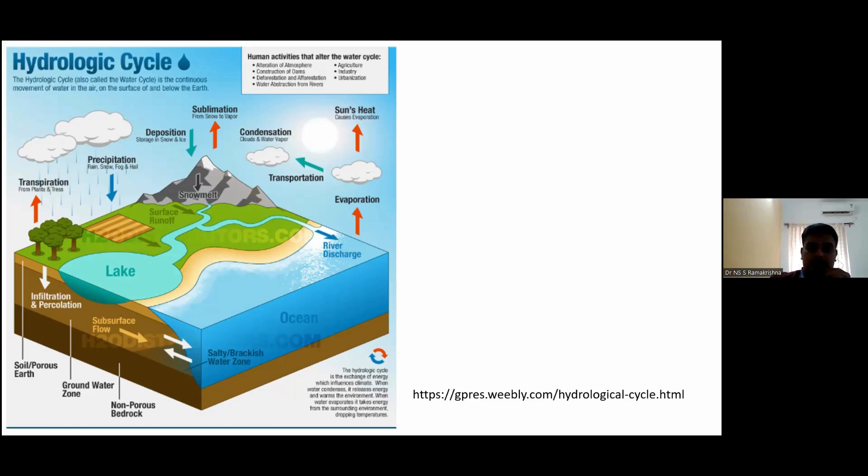Nowadays we can witness irregularity in rainfall. That is also one of the reasons we face water issues, mainly due to deforestation and increased urbanization. These things we need to address.

Then, what are the traditional methods of water conservation? If you see the traditional methods, rainwater harvesting is the best practice from ancient days. Nowadays in some cities it is mandatory, like we need to go for rainwater harvesting, then only the house construction license will be provided, so there is a policy for it. Then efficient irrigation - which irrigation system is effective both for the yield and for the crop, and you can save water also.

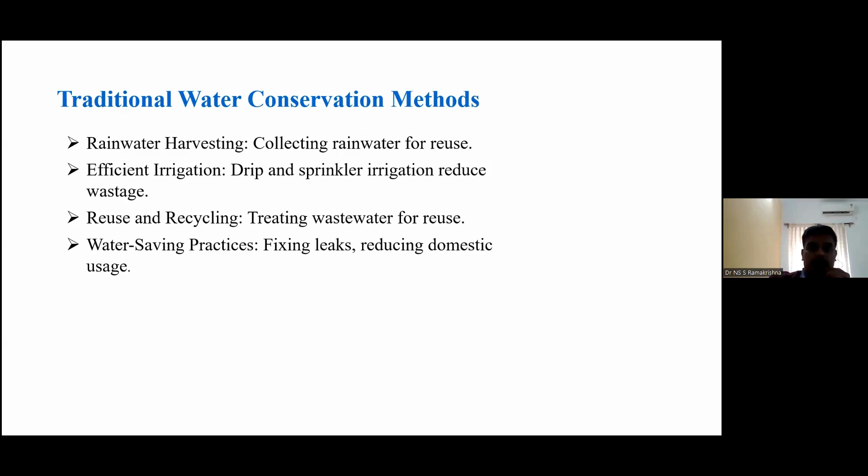And is there any reuse of wastewater? All those practices, along with water saving practices by individuals, will help us save water. You can see in different regions the names are different, but these kinds of structures nearby we can also see, and if you go to any states or nearby states, these kinds of structures will be there.

In some regions it may be called talab, a reservoir kind of thing. In some particular places it is a johad, a community pond, with a community based temple and some ponds. That used to be one of the conservation methods. We can call it Kalyani and all. Then step wells, that is in Gujarat and other places.

There may be a jhalara as they call it, and some earthen bunds, also vented dams. Farmers used to construct vented dams, earthen bunds, to stop the water during the rainy season when there is heavy rain. This water can be used for agriculture or drinking purposes. Then flood water harvesting - excess water we can harvest and save for the non-rainy seasons. We can learn from our ancestors how beautifully they constructed these structures for water storage.

In the lowest region of the city, they used to identify the place for water harvesting, and the conveyance system, how the water is conveyed along the way to the city to these particular places, conserving it in a holistic way.

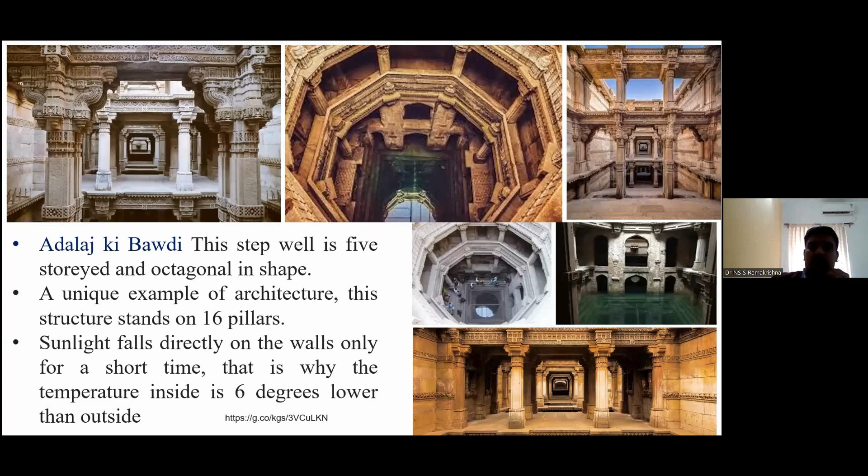This particular example is the Adalaj ki Bawdi, in Ahmedabad, Gujarat. It is a step well, five storeys, octagonal in shape. It's a unique example of architecture having 16 pillars, and sunlight falls on the walls for a very short time, so inside this structure it's always cool. They used to use this water, giving a holistic approach for conserving it.

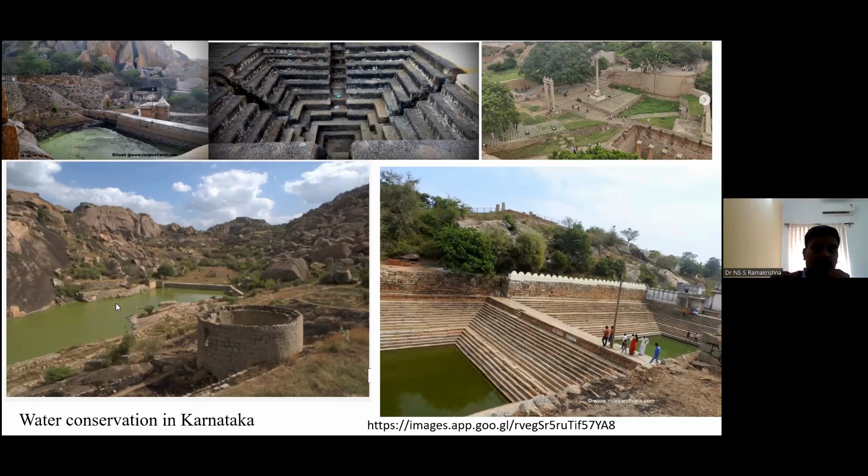These are some other water conservation practices nearby, in Karnataka or other states, where the practice is similar. Take any forts where kingdoms used to be - they used to convey water from the catchment area to a particular pond, filter it using traditional techniques, reuse it with minimum wastage. Some examples are in Melkote near Mysore, Chitradurga and nearby places, where water was stored, conserved, taken into wells and distributed back.

Rainwater harvesting is the best way of storing water. If you harvest rainwater, it reduces the burden of pumping water from source to the end user. Also, resource management will be well maintained.

What are the components of rainwater harvesting? First, the catchment area - our rooftop is a catchment. From the rooftop or pavement or ground, we can collect water on the downstream side, and through gutters, pipes or channels carry and store it. Using basic screening materials like sand, coarse aggregate, fine aggregate and charcoal, you can filter and use it. If properly filtered, you can use it for drinking purposes, and it's well suited for irrigation and, without filtering, at least for toilet flushing.

This reduces the burden of pumping water from source to consumer. Water conservation reduces dependency on groundwater and municipal water - we should not rely on a single source. During the March season, municipal water supply will be very less, and water quality will also deteriorate for many reasons.

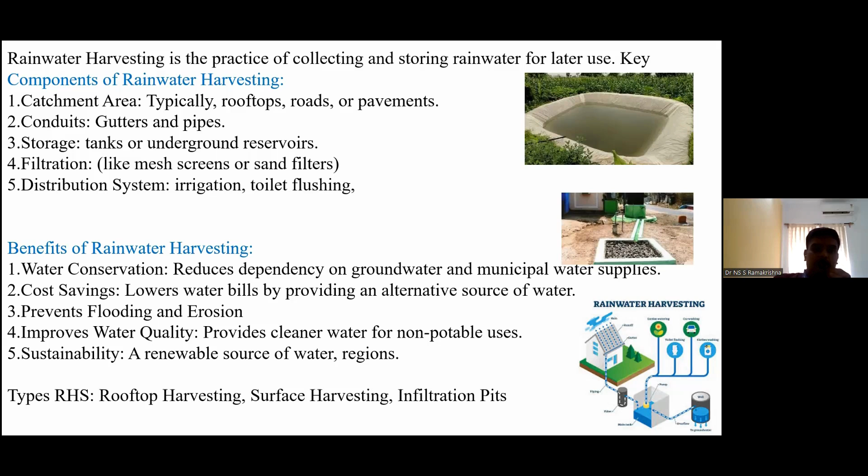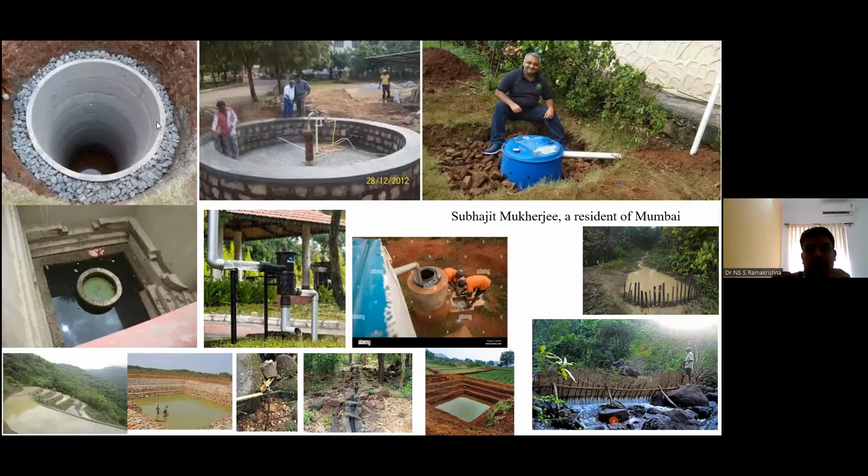Rainwater harvesting can be of any type, smaller or bigger - it's not a problem. Here are some best practices: some construct wells, which should be perforated so nearby water can infiltrate or percolate through this kind of structure. If using rings and such, make sure there is perforation or holes for groundwater to enter.

Besides that, you can make coarse aggregate provisions, or use waste tiles poured next to the piping, so it acts like a gallery where rainwater is harvested and filtered into the well. This way, you at least contribute to groundwater recharge - it may not serve your own purpose directly, but it will recharge nearby wells or the groundwater table.

If it is a tube well, you can construct these kind of structures surrounding it, in a circle, rectangle, or any geometric shape. You can harvest the water using coarse aggregate, fine aggregate, sand, and charcoal combination in layers, so that the infiltrated water has no impurities. This way you can recharge your tube wells or open wells, and it will contribute to the groundwater table increase and groundwater recharge.

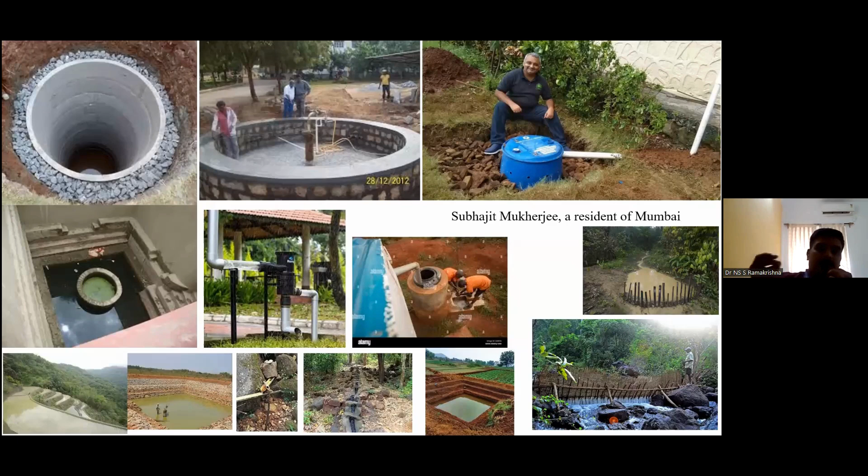Another example, usually seen in rural areas: there will be a pond. In the downstream areas, they select a spot, construct a bund, and store the water. Inside the pond, there will be an open well. The soil acts like an infiltration or filtering media, so the filtered water gets inside the open well. From the open well, that water can be pumped for daily utility usage.

Nowadays you can see this particular filtering media readily available. From the rooftop, this filtering media can be bought from a local vendor, and the first harvested water should not be directly allowed into the borewell or open well. Later, after one or two harvests, the rooftop will be clean. After that, you can close this outlet and directly put the water into the tube well or open well.

There is nothing like this being the only way of harvesting. In a simple way, we can also harvest using locally available materials, or whatever broken tanks or facility we have. Using that, at least we can contribute some portion to groundwater recharge, which will be a great help for our mother nature.

This is a very small bund they have constructed, and this will be sufficient for one or two months for agriculture purposes or animal drinking water. You can see the contour type of cultivation: on a sloping ground, we make contour shapes so water will be stored. After filling the topmost contour, it reaches the next, and the next. By doing this, we can reduce soil erosion as well as contribute to groundwater recharge.

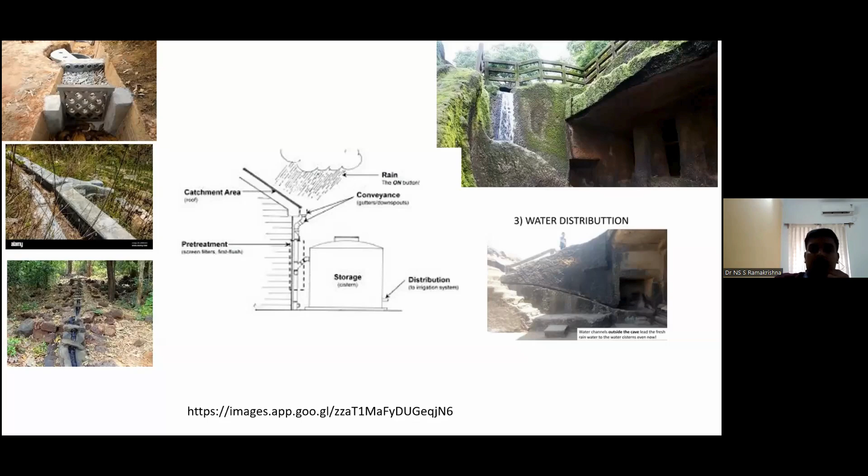In older days also they have practiced this. If you visit any fort, the water management is very well done. I can take the example of Sinhagad Fort. They have a very good water conservation plan.

In the catchment, the topmost catchment, they have wall provisions where all the rainwater will be diverted towards a particular pond. In the pond, it will filter and enter another pond. After filtering, they will use the water for drinking purpose and daily utility purpose. This was the best practice which they had adopted in those days.

Even when the enemy used to attack their fort, they used to plan to stop their drinking water and food provision. But these kingdoms were maintaining water for agriculture and drinking purposes so that without moving out from the fort, they could survive at least 5 years. That was the plan they used to make.

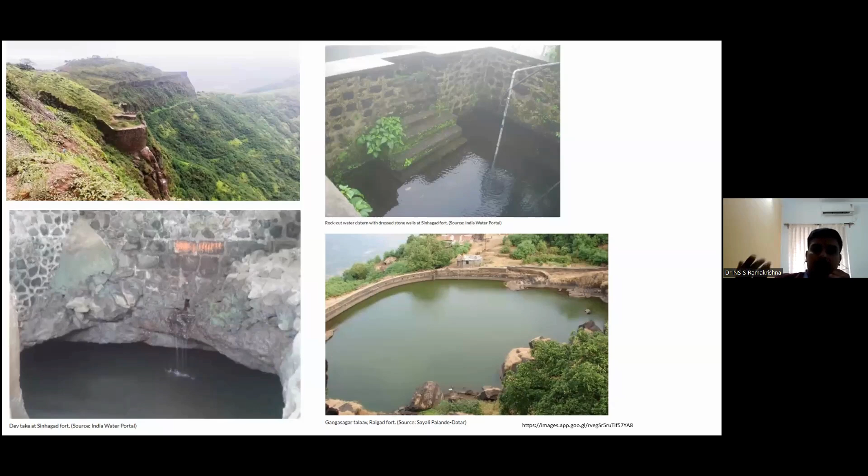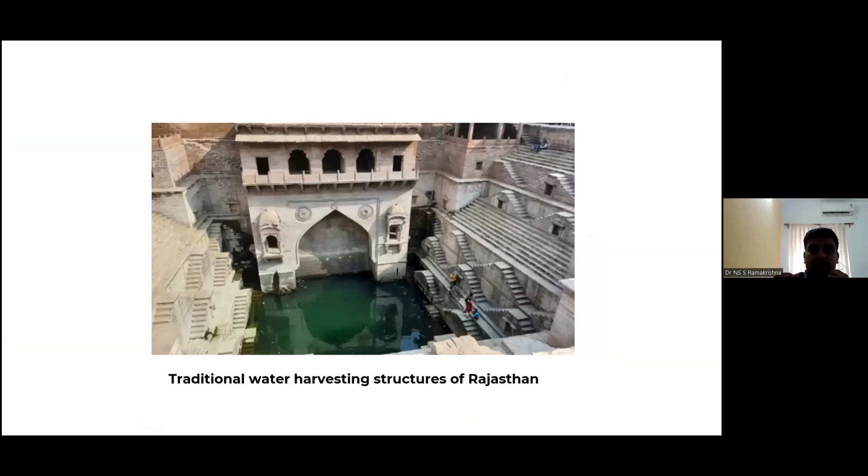So the best practice should be followed in all ways. When coming to harvesting, we need to harvest the water, that is the source of water, the precipitation, then how to save the water. The next portion is maximum utility, which is irrigation. That's because India is an agriculture dependent area, say 70 percent of farmers are dependent on irrigation and all.

So what type of irrigation is suitable? Drip irrigation is the best one because of its efficiency. You can irrigate during non-shining hours. In the daytime, you need not provide water because it may be lost in the form of evaporation. So you can utilize this water by irrigating during the night, so that in the daytime the evaporation will be less, there will be a cooling effect, and whatever amount of water is required for the crop will be self sufficient.

For some crops it is not feasible, for example annual crops, we can't provide drip irrigation. So we have max to max used it where it is a plantation crop, drip irrigation is most useful. In some annual crops, if drip irrigation is not feasible, go for sprinkler irrigation.

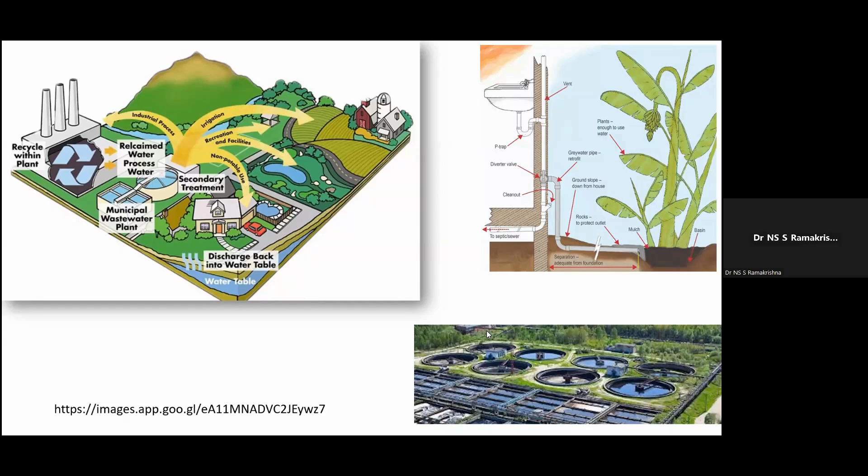Then at a large scale, say industry and domestic combined, all the sewage water can be recycled. Nowadays in Singapore, they are utilizing recycled water only. In India, and in Bangalore also, we have sewage treatment plants, so efficiently we are converting used water into usable water.

Then in an individual manner, if you have some motivation towards our mother earth, instead of using a flood irrigation system, we can go for drip irrigation and mulching around the plant, so that we can control evaporation. Rather than taking long showers, we can cut it off to 5 minutes or less.

Then we can reduce flush tank usage. If you put a filled bottle in your flush tank, you can save 2 liters of water. So if the flushing is set for 20 liters, you can reduce it to 15 liters with some slight modification. In some flush tanks, maximum and minimum water control is also provided, so you can encourage buying those kinds of fixtures.

Use energy saving washing machines, and use nozzle guns instead of ordinary piping of water. Faucets should have aerators, which will reduce the amount of water in a drastic manner. Whenever taps are not in use, please turn them off. And whenever brooming is possible, rather than jet wash, go for brooming.

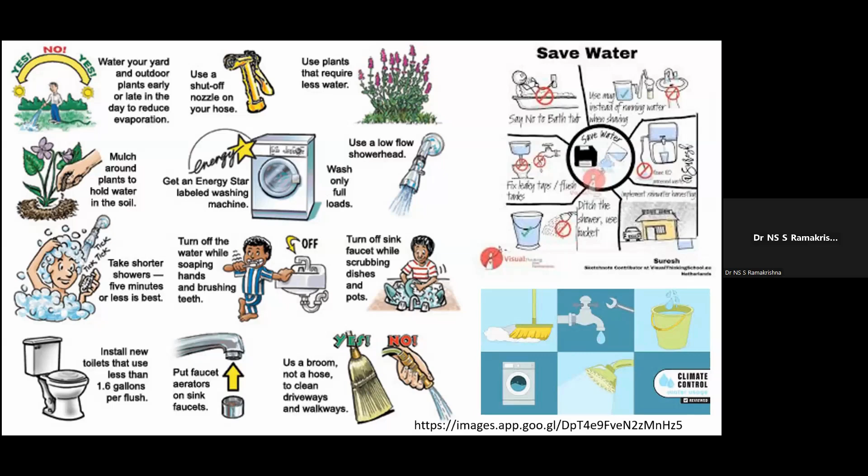So then there is an innovative solution. What technology can be used for saving water? Nowadays everything is smart, so why not in irrigation also, in a smarter way? You can use soil moisture sensors and automatic watering systems. It is possible - in other countries they have already adopted this. They use all the weather parameters as input, and soil moisture sensors for measuring the soil moisture.

That data is also given as input for the Internet of Things. Then it will logically identify crop water requirement and crop demand - we have studies on how much crop requires, what amount of irrigation is needed. Using these techniques, we can optimize irrigation, which will give better yield and better efficiency. These kinds of techniques are useful, whether in a small scale or a large scale.

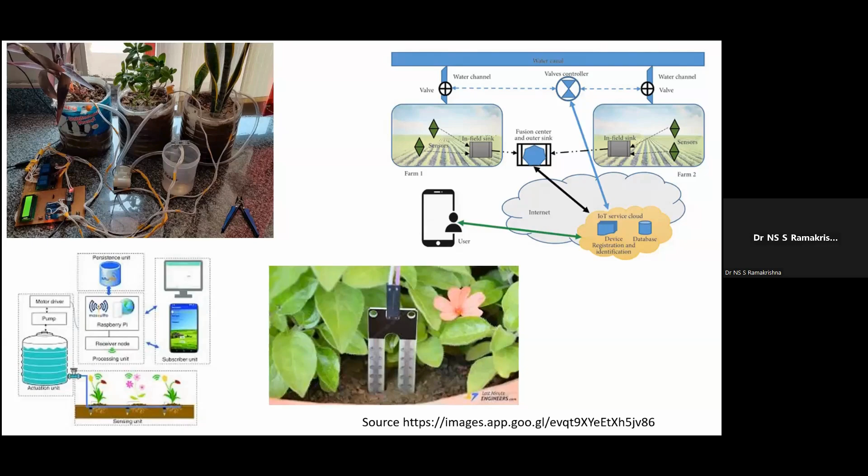Then other techniques - desalination, because 97 percent of water is available in the ocean. You can desalinate the water and use it, but it is the costliest procedure compared to naturally available water. You need energy for heating, and the evaporated water needs to be collected, but the fresh water collected from precipitation has minerals that may not be available in this processed water.

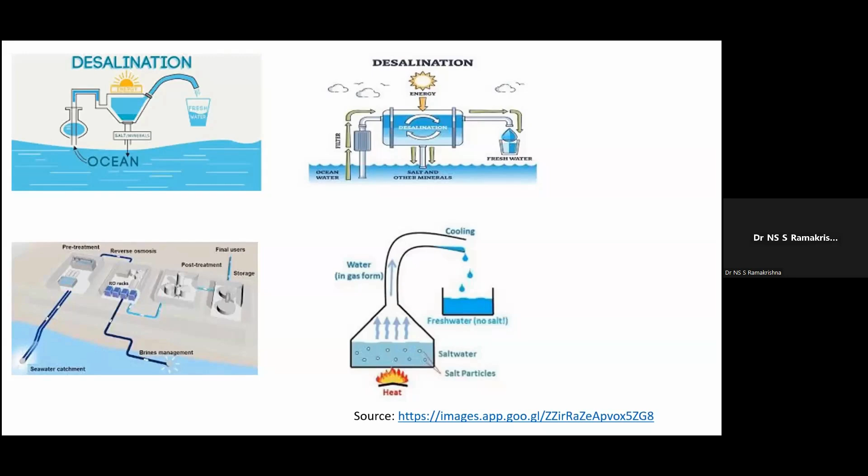What Mother Earth has given has all the minerals and required supplements in that water for the human body. If you treat these waters through desalination, some deficiency may occur. That is why the first preference should be for our gifted water - that is the precipitation water we need to utilize.

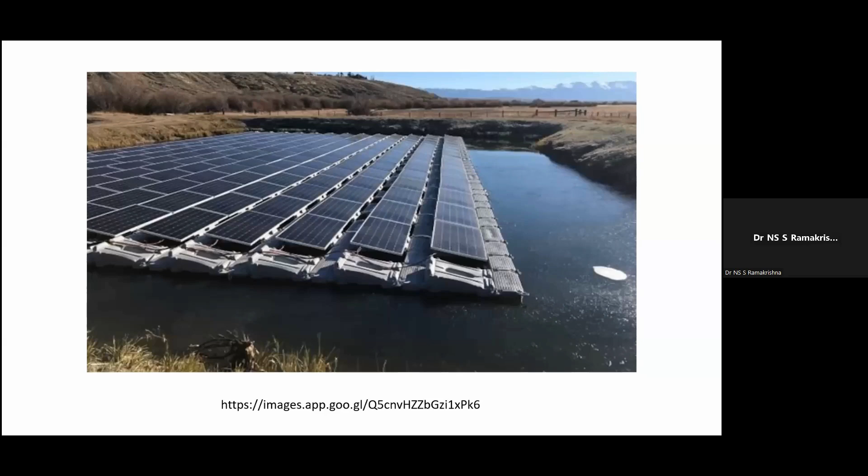So some techniques like wherever there are water bodies, they can be used for solar panel installation for electricity production. This serves two purposes: land use is a problem because land has high value, so if you install solar panels on land, scarcity will occur. But installing solar panels on water bodies has two advantages: one, you can control evaporation, saving water, and the area is utilized. Also, the heat energy produced at the bottom of these solar panels gets dissipated by the water body. By integrating these techniques, we can achieve maximum benefits.

Some nanotechnology-based water treatment methods are coming up nowadays. You can use nanomaterials for desalination or for particular bacteria treatment purposes, to treat wastewater using the latest technologies.

Nowadays everything is about data, so why can't we collect data from a reservoir using sensors? We can monitor if a particular house is utilizing a particular amount of water; if it suddenly increases or decreases, that is information telling us something may be damaged or there is a leakage. So water meters and sensors help us identify leakages, preventing them to save water, and the required amount of water will be automatically driven by the source.

These things are very much essential nowadays, and these technologies are being adopted. This reduces the burden on wastewater treatment, because without these techniques, leaked water simply enters the sewage treatment plants, creating an additional burden. That water needs to be pumped through coagulation, sedimentation, and settlement tanks, creating a huge load on water treatment plants. So these kinds of techniques are very much essential.

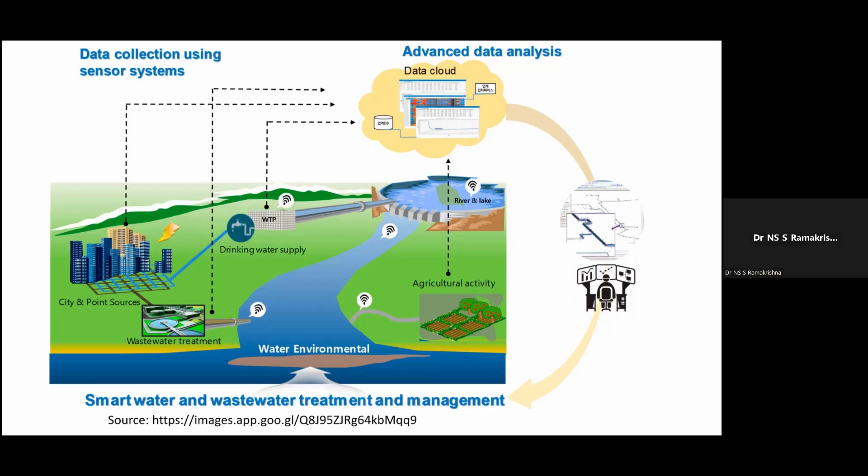Smart water and wastewater treatment and management is very much essential nowadays.

So what are the nature-based solutions? Nature is already giving some solutions to preserve or save water. We have wetlands, and the wetland ecosystem is a very beautiful thing. For human beings, it provides aesthetic services and recreational opportunities. Unfortunately, we are losing so many wetlands nearby. It is an ecosystem where a small fishing zone and new types of fish breeding occur, among other things.

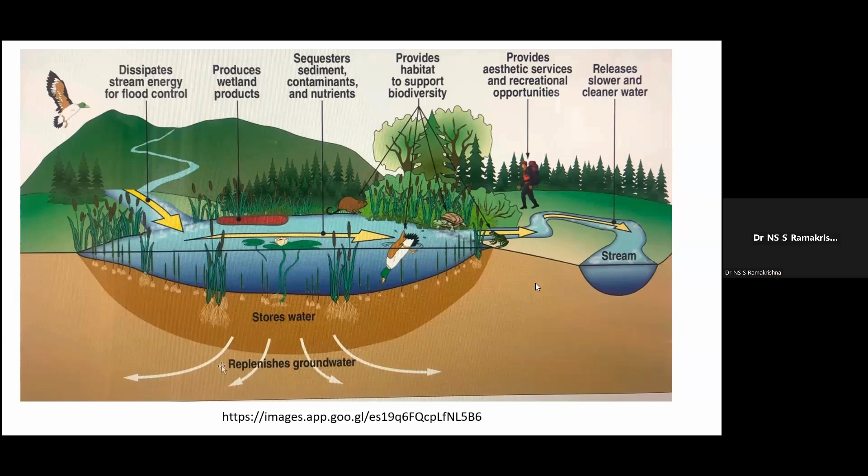We have a threat to this particular ecosystem nowadays, so we have to identify and preserve it. What happens is that wetlands store water, and slowly it reaches the groundwater, with the settled water being free from debris. Later it joins the stream. So it serves the purpose of groundwater recharge, ecosystem support, and acts as a water purifying agent.

There are nature-based solutions already available; the best example is the mangrove forest. Earlier we used to see a lot of mangroves, but now they are removed to construct breakwaters. These mangroves dissipate energy from the tides, protecting the coastal region naturally, while also supporting an ecosystem. This should be encouraged rather than human-made breakwaters, because it serves both purposes: ecosystem support and recharge, along with aesthetic views and recreation centers.

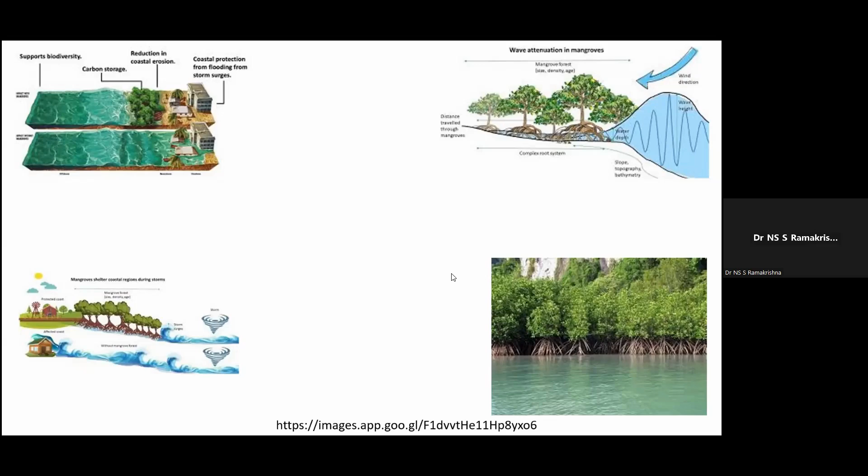Nowadays in Mangalore, if you see everywhere, there is pavement. Once a high-rise building comes, they put in interlocks, and when roads are provided without drainage, there will be rigid or flexible pavements, and rooftops are covered with GI sheets. So where water has to percolate, there is no provision for it at all. This water enters the lowest portion, and if there's a blockage in drainage, the entire area floods. That's why wherever possible on roads, provisions should be made so that water runoff from pavements is collected through permeable soils and infiltration media.

By means of which we can convey this water to the required ponds, that should be the best practice. Rather than converting the entire area into a paved one, these kinds of practices are the best. Sometimes percolated pavements, or a particular interlocking system, should have some infiltration capacity. So a small adoption leads to maximum contribution to mother earth. Cities should avoid making the entire city a pavement or a rigid, man-made thing. Some provision for gardening, infiltration galleries, recharge pits, rainwater harvesting units are very much essential.

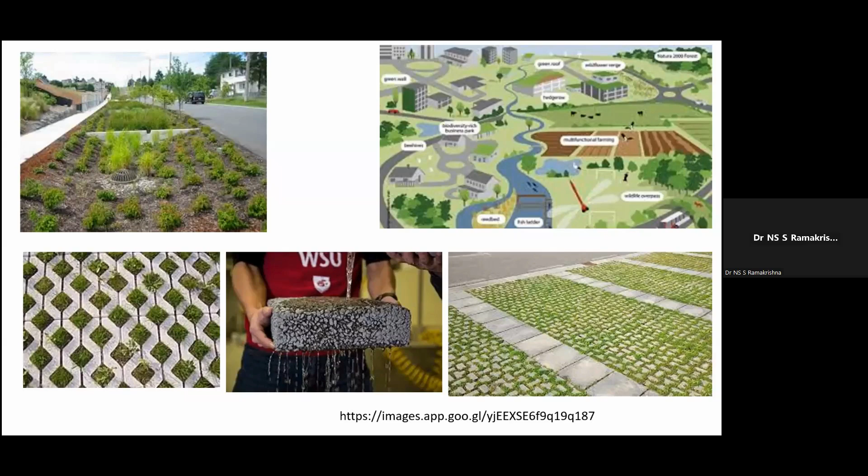And if you are cultivating some crops, mulching means covering the soil portion other than the plant with some cover, it may be rice husk, straw, polythene paper, or coconut coir. Anything may be okay, but it acts both as a fertilizer and it reduces evaporation, loss of water. That is very much essential. These practices will be best practice for conserving water.

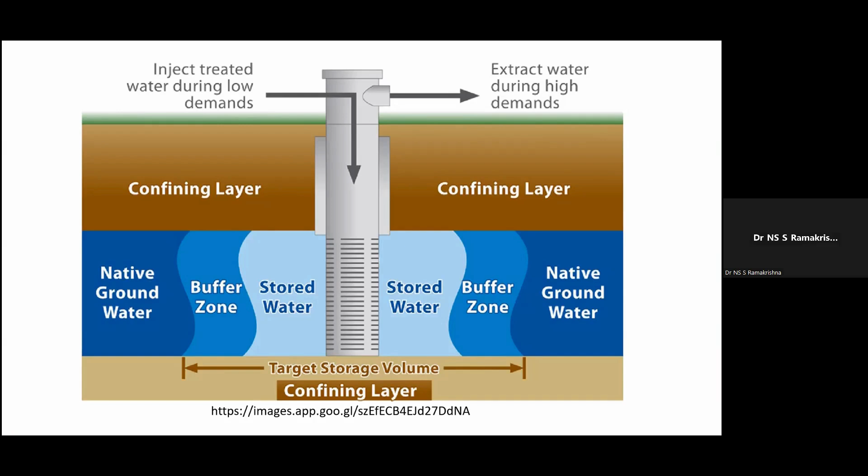And if an industry has a giving-back-to-society policy, whatever used water they have, after filtering and purifying, that water can be re-injected into the groundwater. So it will contribute to groundwater recharge and create a source of drinking water and groundwater recharge.

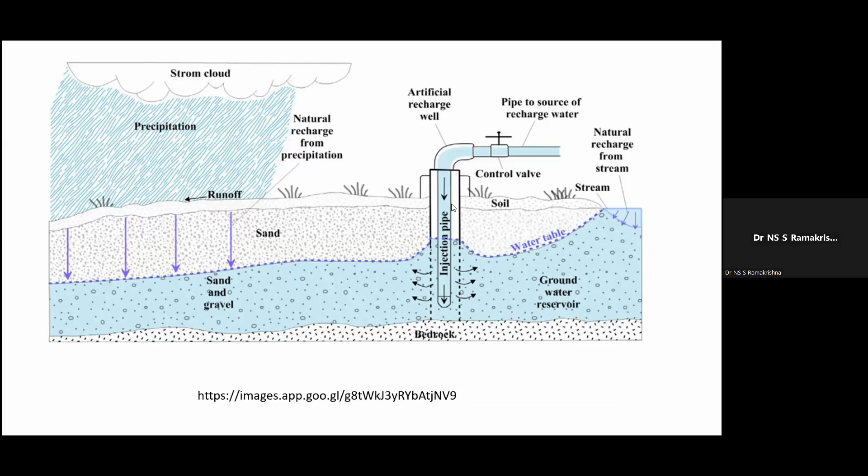That's how an individual, even in a house, in a domestic, small scale, also we can do that. We can recharge groundwater by means of, around a tube well, surrounding one meter or at least three feet area, we can use as a gallery to recharge the groundwater.

And educating at the school level itself about the importance of water and why we need to conserve it is important, because nowadays there is a don't-care attitude. If a tap is open, we can see some videos where an animal will close the tap, but a human being is not interested to close the tap. If the water is leaking, nobody bothers, he will just run off. But that is of utmost importance.

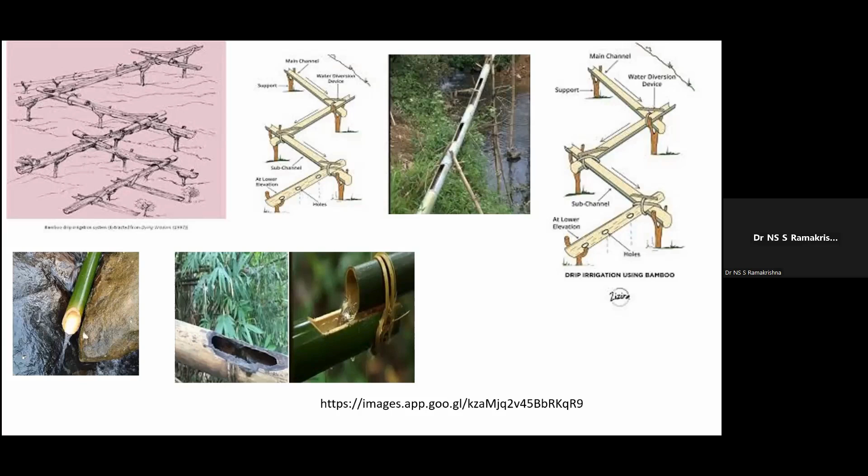Ancient techniques, like in Meghalaya or some other places like Nagaland, they used to have bamboo as conduits to carry water from hilly areas to their farmland and agriculture. So this, they were using as a drip irrigation system.

So water management can be possible in the agriculture sector through irrigation practices. In the construction sector, they simply keep the tap open while doing other work. We have to control these things, because getting water from tankers and wasting it may not be feasible for construction activity. In residential buildings, what are the conservation techniques? In recreational industries, how is water managed and recycled? And in manufacturing industries, where water is used as a coolant, how is the water managed? It should be economical and in a sustainable way of management, so that the best utilization will be done.

So we already discussed these things. If possible, we need to adopt advanced technology. We may talk about AI, artificial intelligence, it is required in this area also. When we need water, when there is a presence of a person, only then should the tap go on, then it should automatically turn off. Some quantity should be maintained, so that much quantity it has to discharge. All these things we can develop and adopt for day-to-day life.

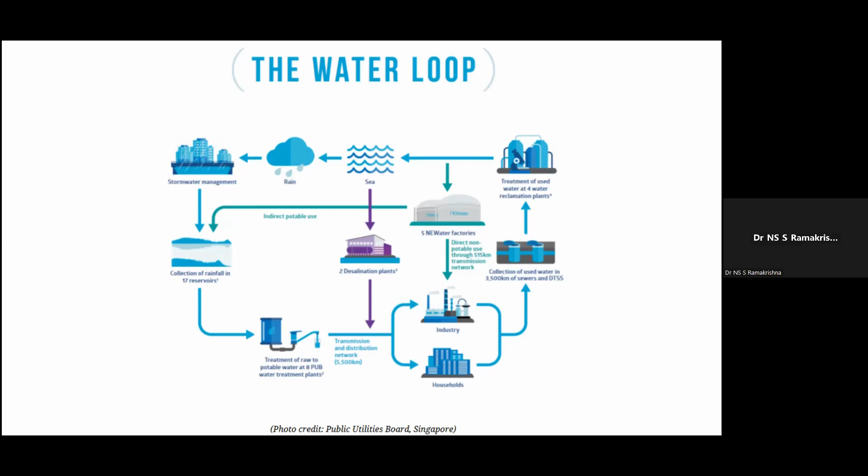Storm water management is best practice, and whatever waste water there is needs to be treated well and utilized. Desalination should be done wherever necessary, because with a growing population, the demand increases, and industrialization also requires water. So we need to adapt and conserve water at any cost.

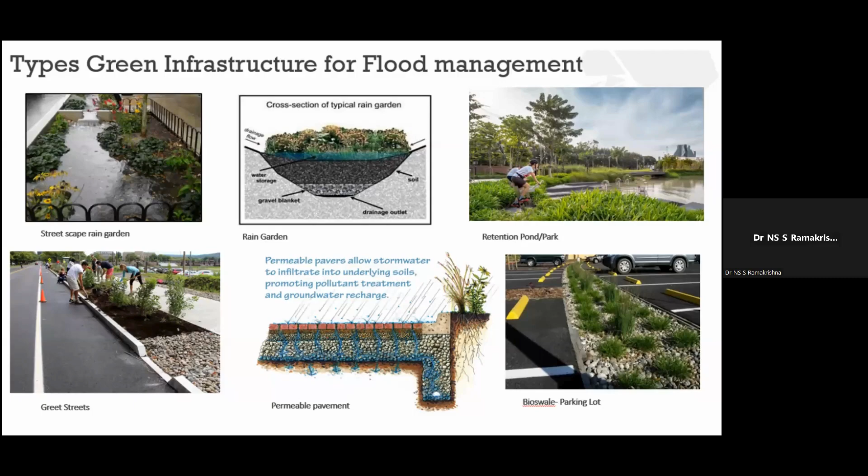Green infrastructure and flood management are most essential. Nowhere can we see these kinds of structures, where coarse aggregate or pebbles are put so water is filtered through permeable pavements and reaches the ground, or through channels we can draw water to ponds. These things are very essential. Nowadays we talk about smart cities, but these provisions are not available. We need to look into it.

Ultimately we can conclude that whether it is person based, technology based, nature based, or community driven, any way of conservation we need to adopt. The integration of traditional and modern methods is fine, sustainable management is required, and awareness is very essential, because every drop counts. Act today to save water for tomorrow.

That is what is in the sustainable development goals. Whatever goals the United Nations has kept, there are 17 goals, and in that, everyone has access to clean water and sanitation. This sustainable development is a model of development that meets the needs of the present without compromising the ability of future generations to meet their own needs.

This was there in the ancient period only. Now they are calling it SDG 6, but it was already there with our ancient ancestors, already followed. I will end my talk with a few heroes, I can call them heroes. This slogan, wherever rivers Ganga, Yamuna, Godavari, Saraswati, Narmada, Sindhu, and Kaveri, please be present in this water, we used to chant. Our ancestors gave a holy approach to this water, and a few heroes have understood the value of water.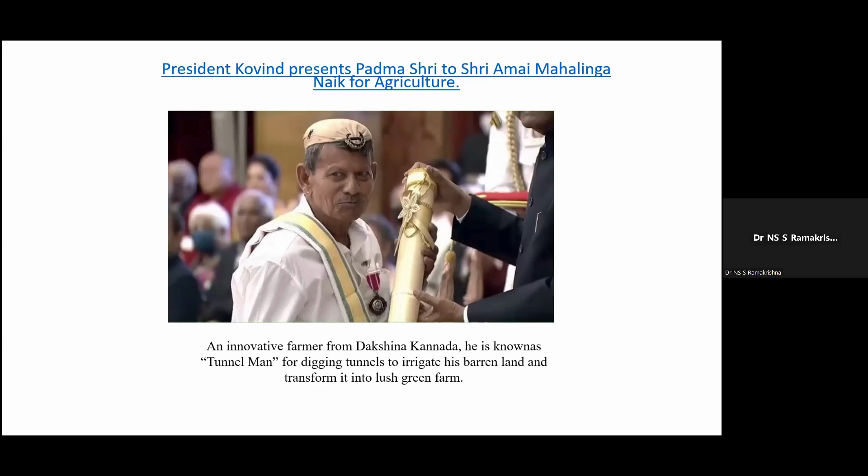Then our own Dakshina Kannada person, known as the tunnel man, dug water from a tunnel and converted barren land into lush green farm. He was also awarded the Padma Shri award. And at 84 years, a shepherd from Karnataka created 14 ponds for animals to drink from. His name is Kemagowda.

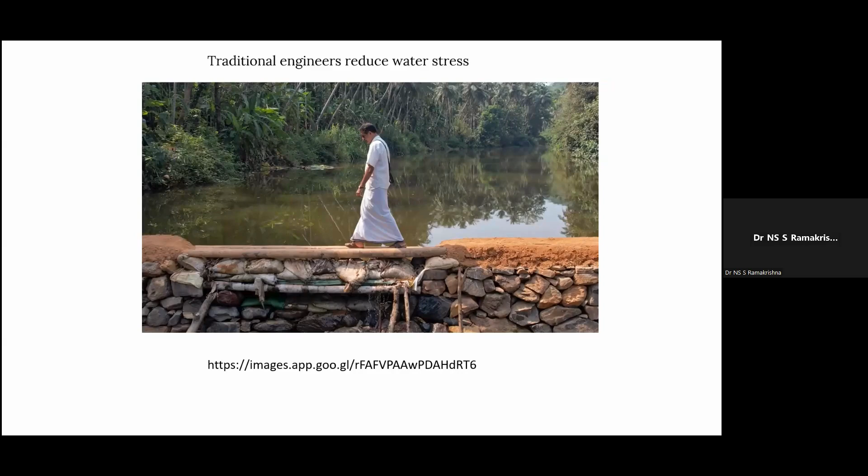There are many civil engineers, traditional engineers I can call them. There are unnoticed engineers in our community who conserve water, at least for it to be utilized for any purpose, drinking water, agriculture purpose, or aquaculture. So there are real engineers.